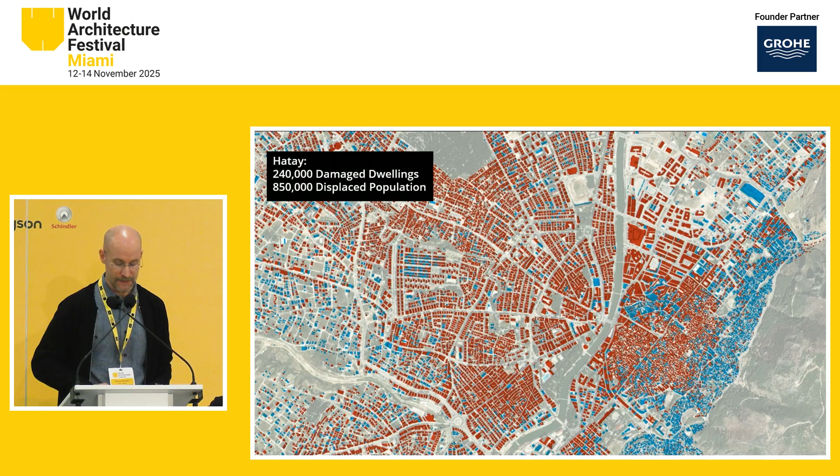This map of Antakya, which is the provincial capital, shows in red the structures that were deemed unsafe, a graphic reminder of the scale of the loss. Faced with such devastation, we asked ourselves, how can design genuinely help? How can we guide recovery rather than simply rebuild what was lost?

Antakya's story reaches back over 2 millennia, from the Hellenistic Antioch to the Roman and Ottoman periods. It grew as a place where cultures and faiths met, often around food and shared public life. Before the earthquake, the city was facing many challenges familiar to many other places: rapid growth and urban sprawl, limited public space, and traffic congestion. Our key question became, how do we balance restoration with renewal, respecting the city's memory while improving daily life?

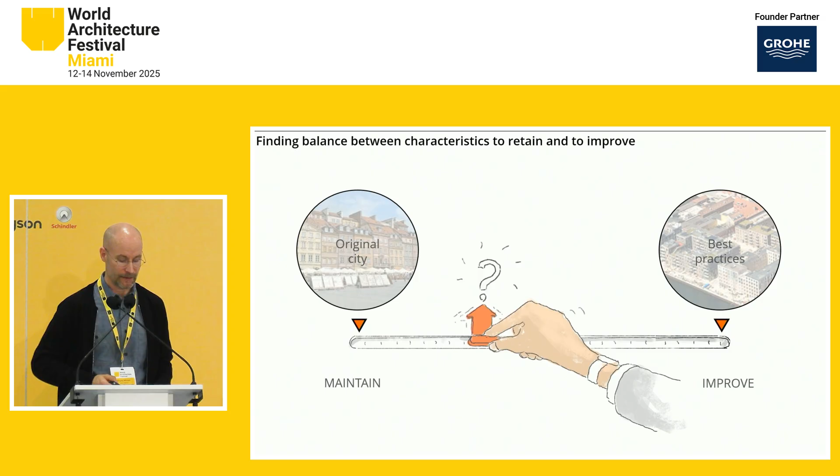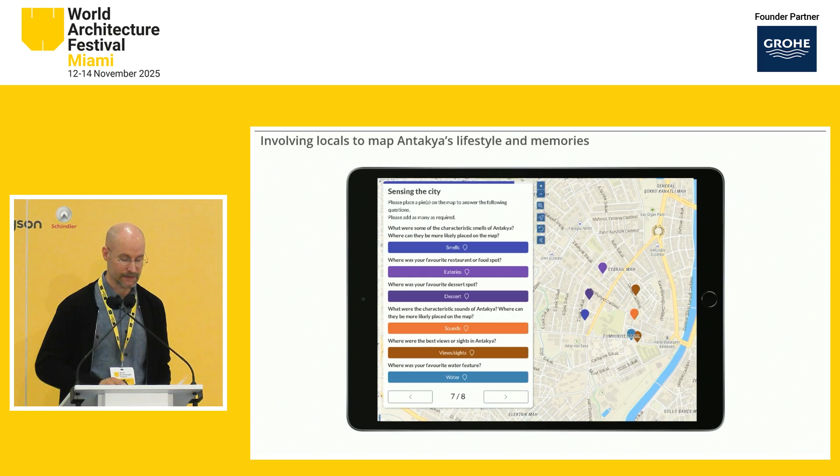Research, understanding, and listening were important parts of the process before translating those insights into a strategy to restore Antakya's sense of place and improve resilience. Through a series of interviews with local residents, we learned about the memories of a city with shared courtyards, narrow alleys, and close-knit communities. We complemented these stories with a web-based survey that allowed displaced families to share their experience and favorite places in Antakya. And we also met and workshopped with our client, consultants, and local stakeholders to test and evaluate ideas.

We realized that preserving the sense of place is central to collective healing. Our methodology began by recalling lost relationships, the scale of streets, courtyards, and blocks that gave Antakya its distinctive character. We began in the historic center, the area designated as a priority reconstruction zone. To illustrate our thinking, we focused just on a single representative block.

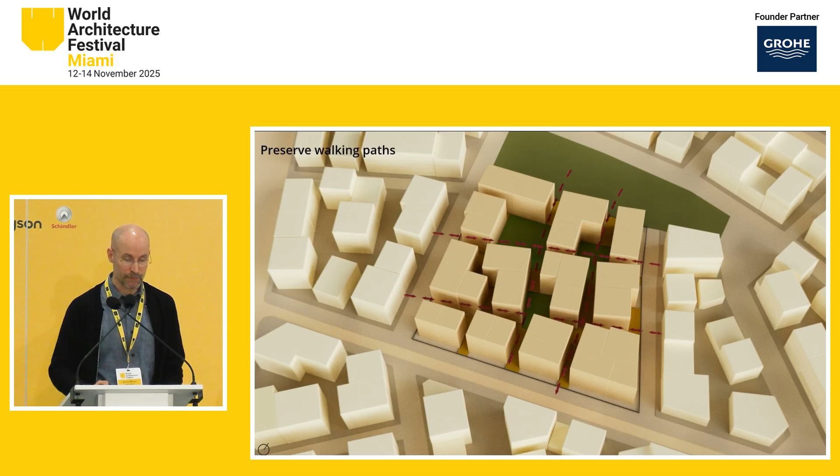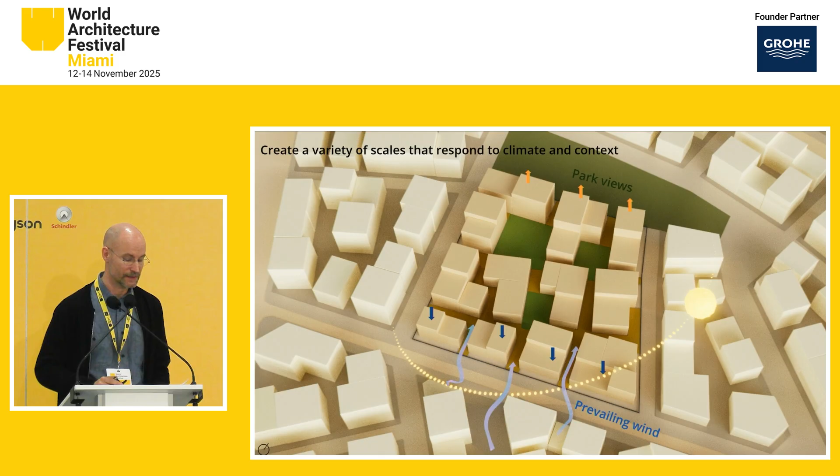Our ambition was to retain the familiar structure, the pattern of blocks and alleys, while introducing pockets of open space for the community. We defined envelopes that reflected the scale of the pre-earthquake fabric and introduced subdivisions to increase permeability and reflect the rhythm of buildings that was so characteristic for Antakya. We further refined the massing to respond to the local microclimate and context to create a final layout that is rich in texture and reflects the diversity and urban character of Antakya.

Ultimately, we want to bring back the familiar rhythm of everyday life where children can play and move away from cars and traffic. We want to design spaces where communities that suffered unbelievable grief and loss can come together again, not to forget, but to commemorate and celebrate the resilience of those communities. And we want the streets that once were the arteries of the city to again host public life and commerce.

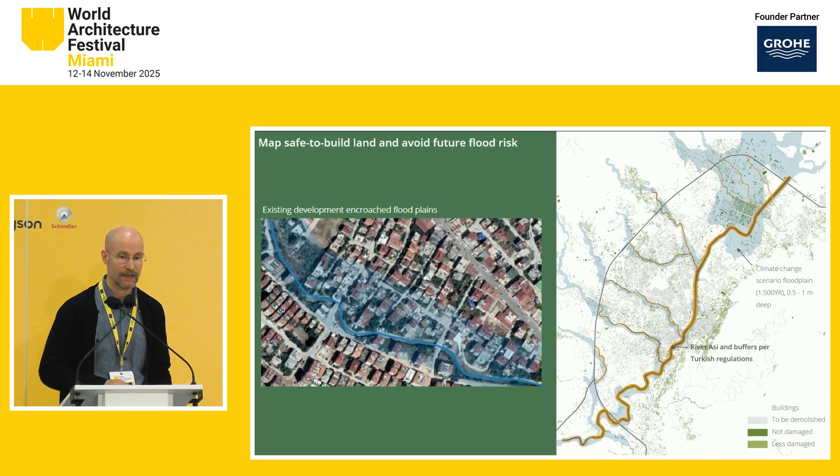Building on that priority zone experience, we expanded the framework of what we learned to the wider city. Our approach rested on 4 principles: rebuild on safe and resilient land, restore the city's spatial memory, grow inclusive public realm, and rebuild recognizable neighborhoods. The floodplains of both the river and the local streams had been encroached by development over the years, increasing the exposure to natural disaster risk. Our plan restores those streams with widened buffers for flood resilience, and in turn creates a series of linear parks and wetlands for the adjacent communities.

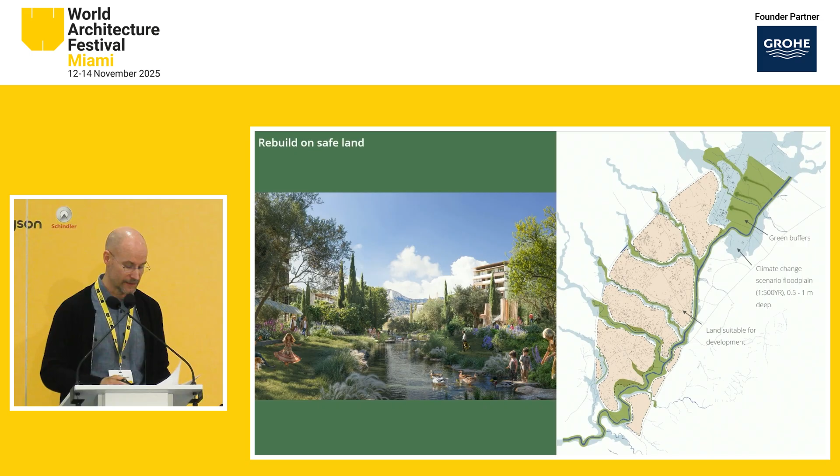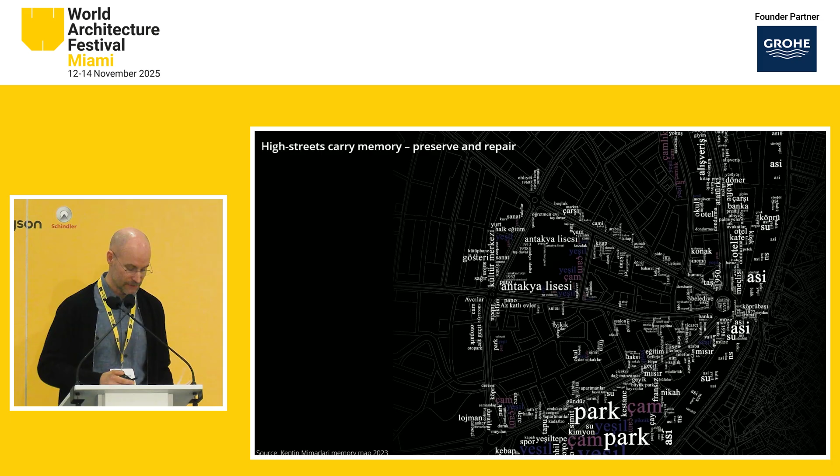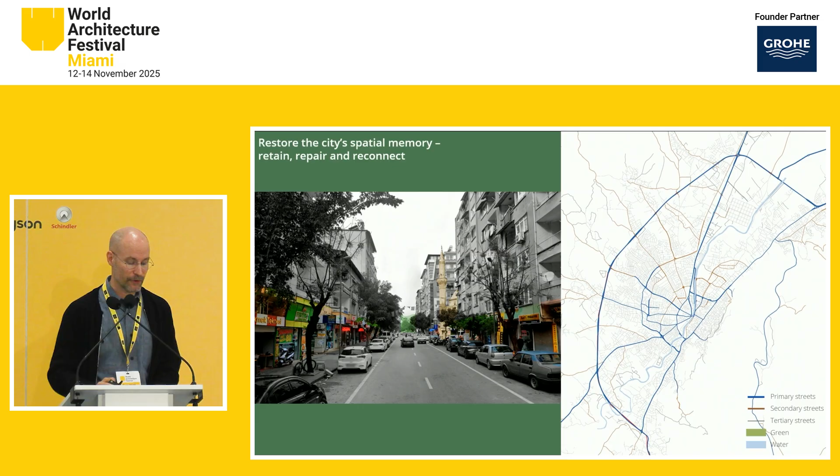What is a city's spatial memory and where is it? A group of locals were asked by the author of this map to describe in a single memorable word the places in Antakya. Mapping out these responses created this map of social interactions, not just highlighting the main streets, but also the main plazas and high streets in the city. These main streets west of the River Asi had been characteristic with their radial layout, with many of the streets converging into the riverfront civic center. Our plan restores this structure and refines the hierarchy for easy navigation, providing adequate space for pedestrians, cyclists, and public transport.

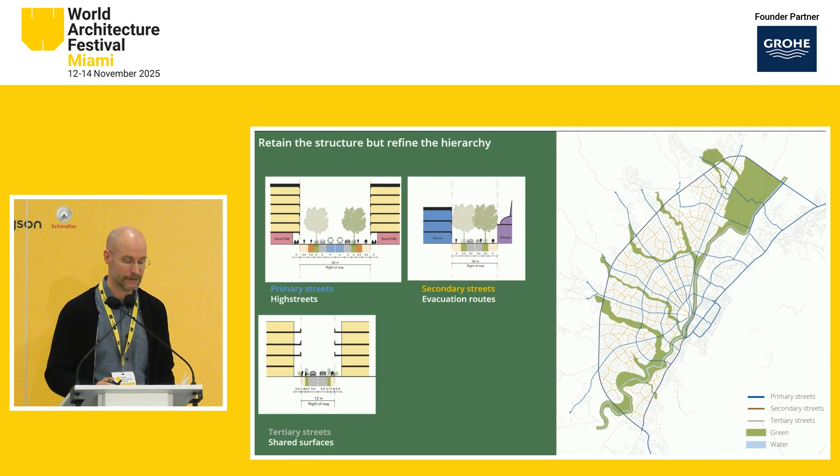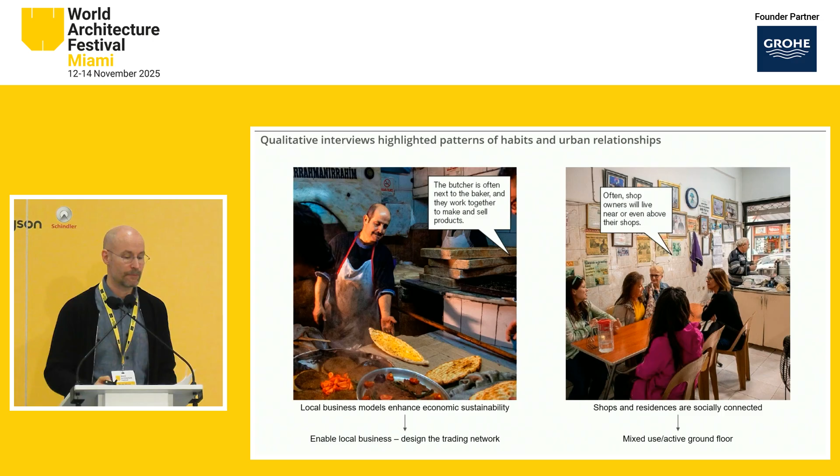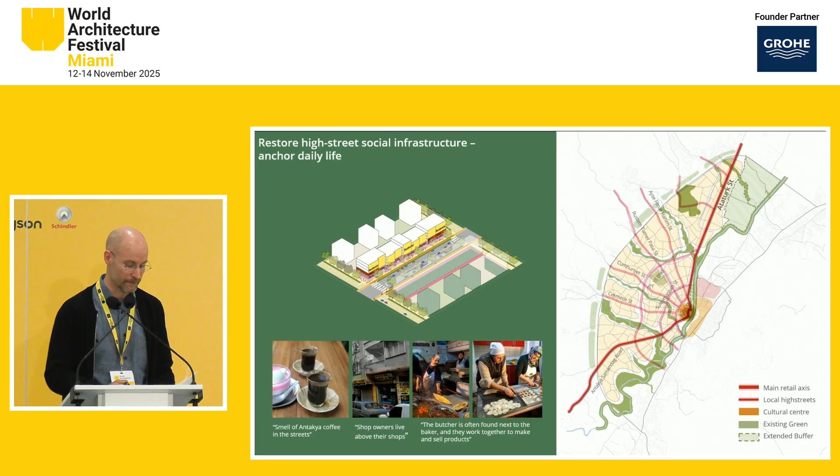Interviews also revealed the patterns of co-location between certain shops and the intimate link between living and working. Shopkeepers often lived above or beside their stores. Our plan creates a network of local high streets that ensure that everybody's daily needs are met in a short walk from their home. And by creating an active ground plane along the major routes, we bring vitality back to the city.

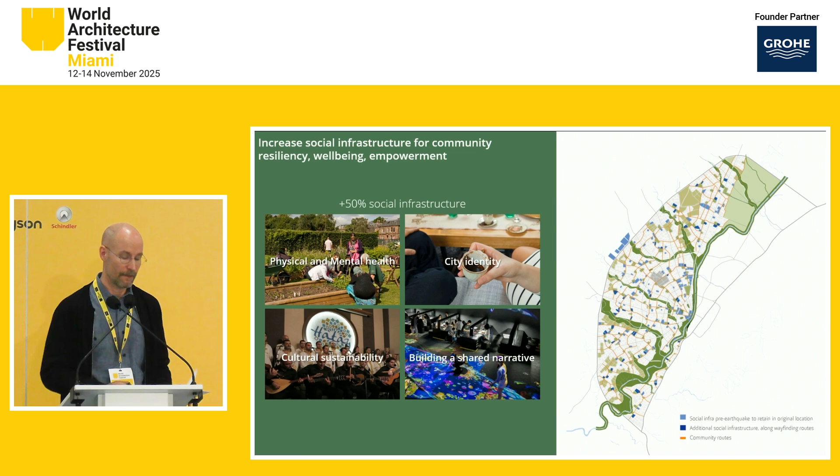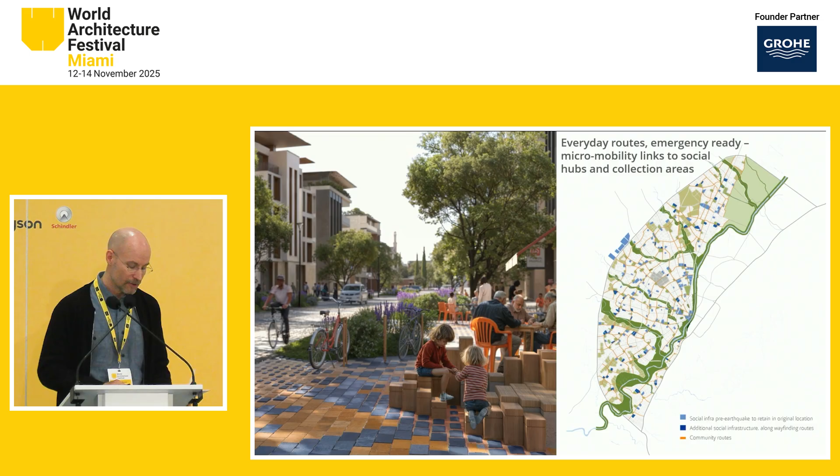Re-establishing community landmarks is equally vital. Most schools and cultural buildings were destroyed, yet their sites remain meaningful. Our strategy reinstates social infrastructure on these familiar plots, reinforcing memory and accessibility before infilling areas that were underserved. Throughout the master plan, we created a network of community routes that connect the social infrastructure to the master plan. These micromobility links also function as routes to resilience hubs in case of an emergency.

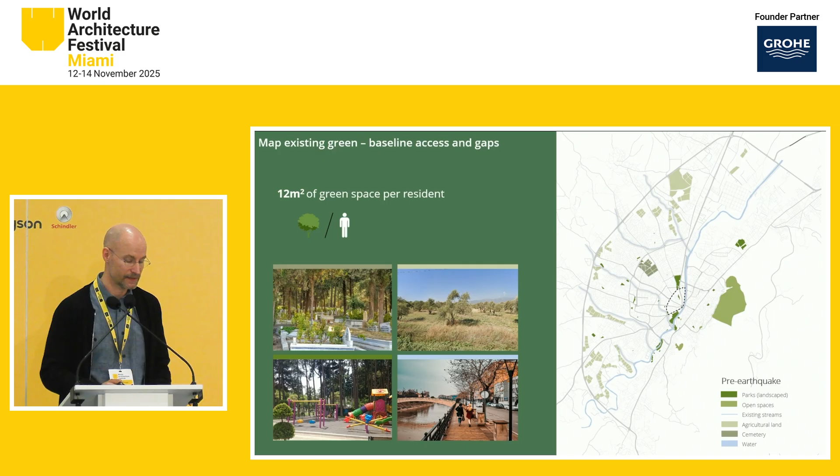Overall, we were able to double the provision of green spaces from 12 square meters per resident to 25 square meters per resident, made up of different typologies of open space, from linear parks along the streams to the local plazas and parks. The River Asi today is canalized and inaccessible. It is our plan for it to be renaturalized, allowing Antakya citizens to again connect with the landscape that shaped their history.

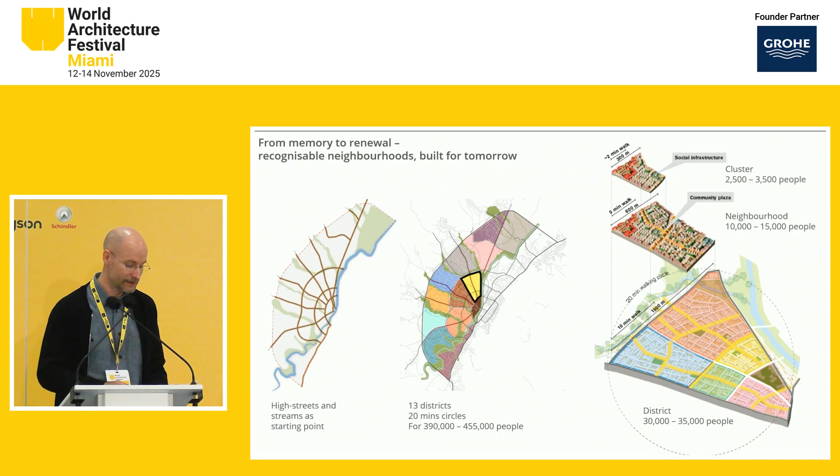Having built up the structure of the city with linear parks and the street network, we then created 13 districts, each forming a 20-minute city. Utilizing the building condition dataset, we identified structures that were still in sound condition for habitation, and we used these buildings as the starting point. We then overlaid the road hierarchy and the local high streets and created bigger commercial clusters at the intersection of major routes.

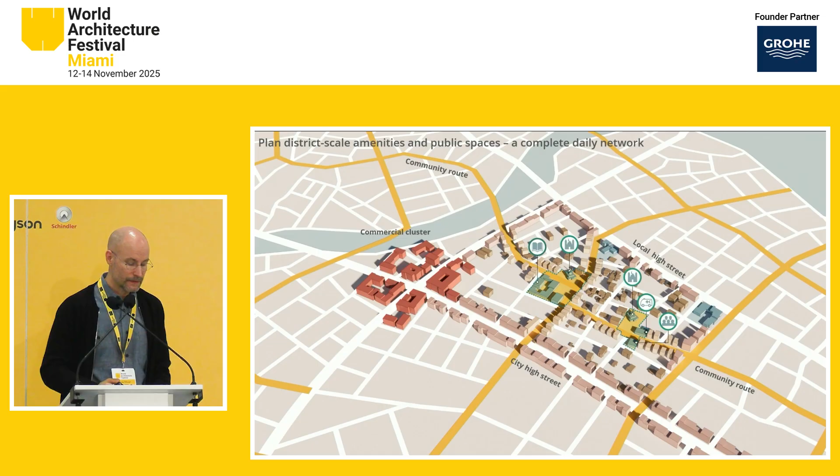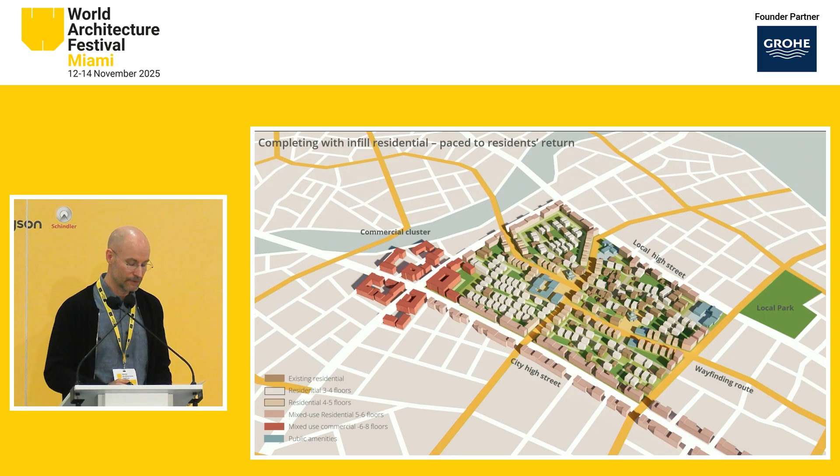Along these community routes that I've mentioned earlier, we placed all the amenities and the plazas for the community to come together. Continuous residential frontages and taller buildings define the edges of those districts, and eventually the residential buildings will start to fill out each of those districts. Applied across all of these 13 districts, this approach forms a coherent strategy for rebuilding Antakya, creating homes, jobs, and resilient communities for the hundreds of thousands who lost almost everything on that February morning.

This project is of a scale and complexity that we don't encounter that often. What we've shared is not a construction-ready blueprint, but a strategy for recovery, one grounded in memory, resilience, and collaboration. Rebuilding Antakya will demand partnership at every level, but it begins with a shared vision to restore both the fabric and spirit of this remarkable city.